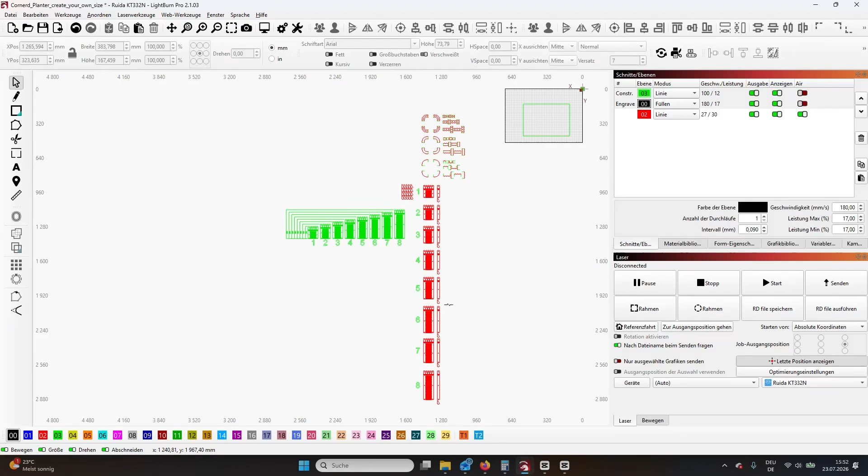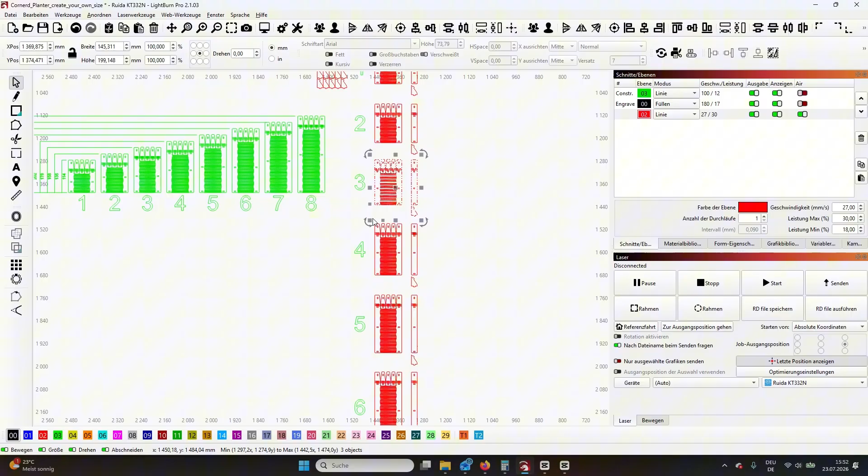First, choose the height of your planter, for example, number 3. Duplicate it by pressing Ctrl+D. Now duplicate the template for the top ring.

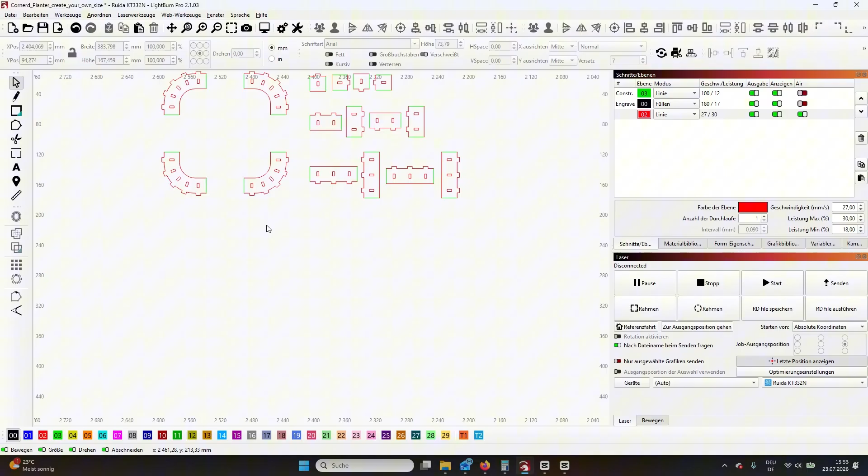Create a little space between the corners. Choose the desired section. You can use one or several in different lengths and widths. Then snap them to the corners.

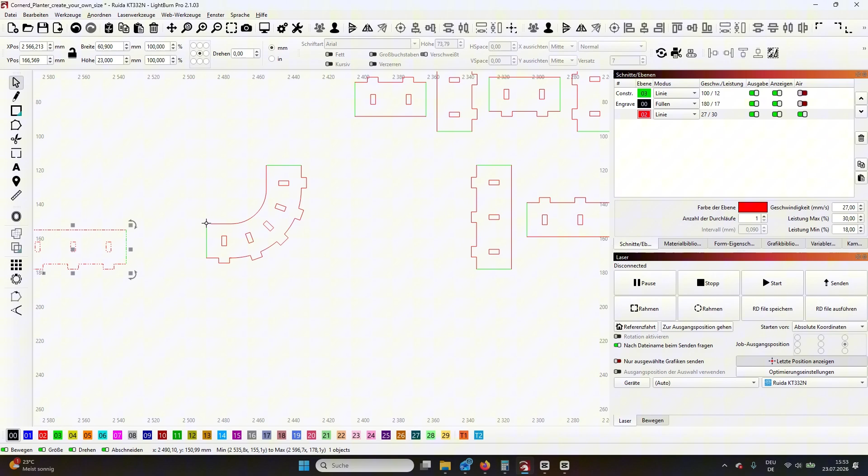Note, I made a mistake here. If you want to extend the planter by 5 slats later, you need to insert modules with 5 tabs here, one with 3 tabs and one with 2 tabs, instead of using only the 3-tab module.

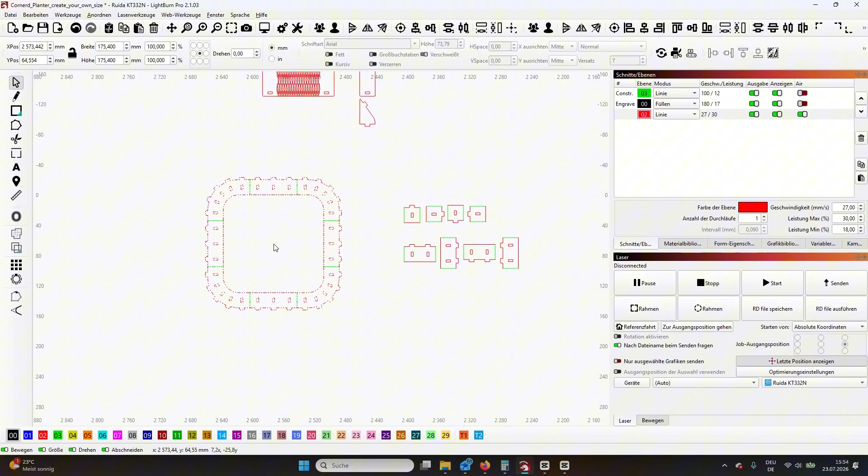Repeat the same process for the next 2 rings.

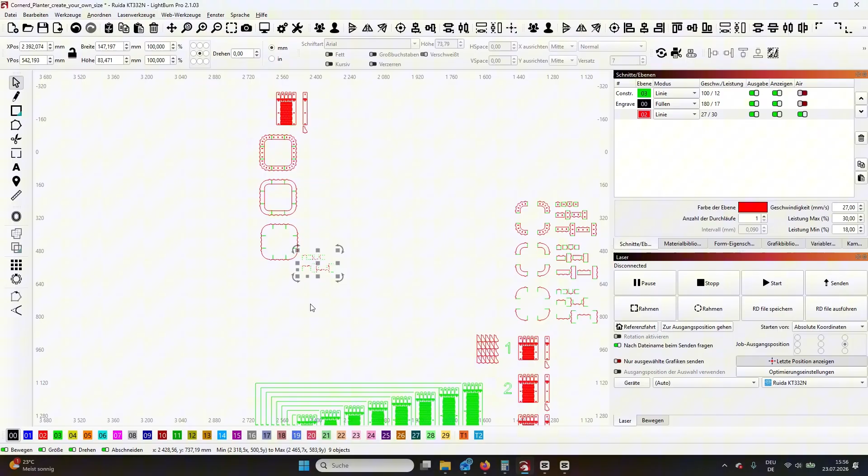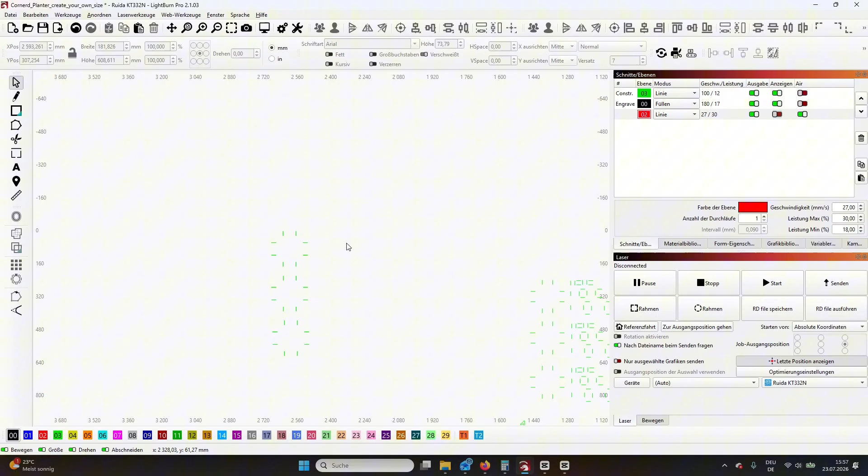Ungroup the design by pressing Ctrl+U, disable the red layer, and delete the green guidelines. Enable the red layer again.

Select all lines and press Ctrl+J to join them. Then group each ring individually again.

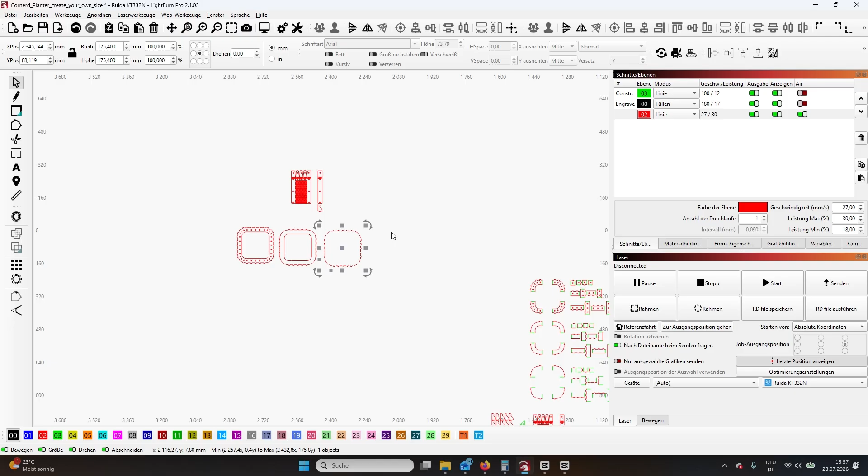Now duplicate the minimum number of corner connectors and add the required number of slats for each side.

Now duplicate the required corner connectors for all 4 sides.

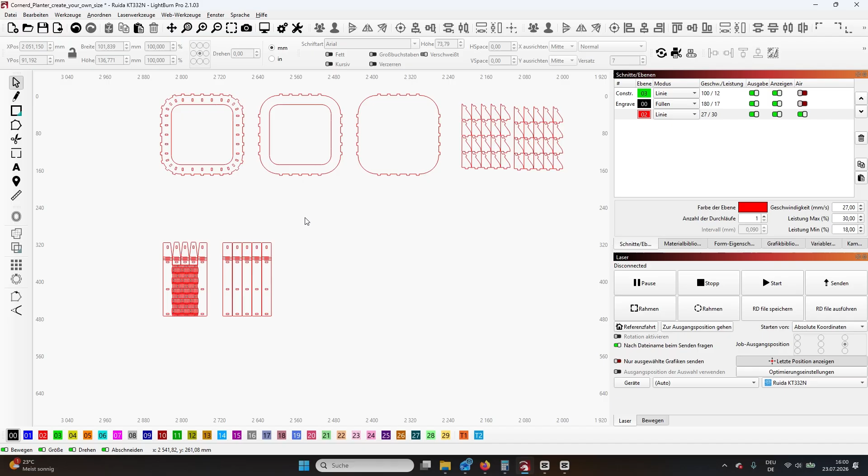Group the slat module by pressing Ctrl+G, then snap the module to the corner piece.

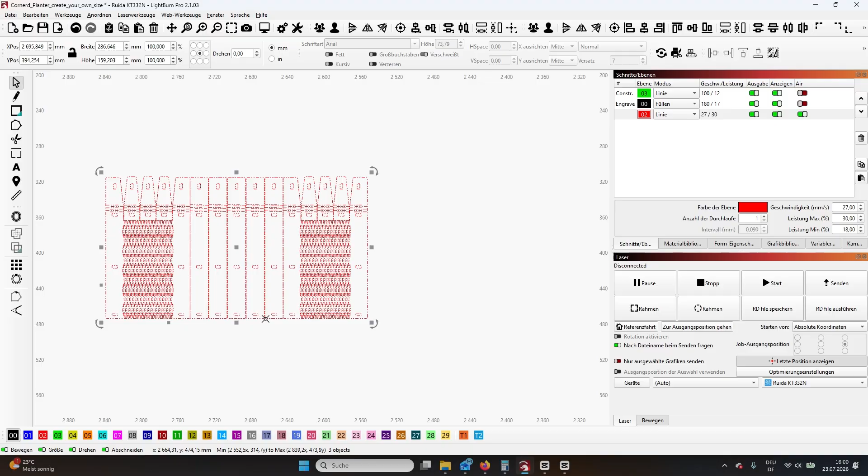Duplicate the left corner piece, then snap it to the right side of the slat module. Finally, enter -0.5 in the X position to create a 0.5 mm gap between the modules.

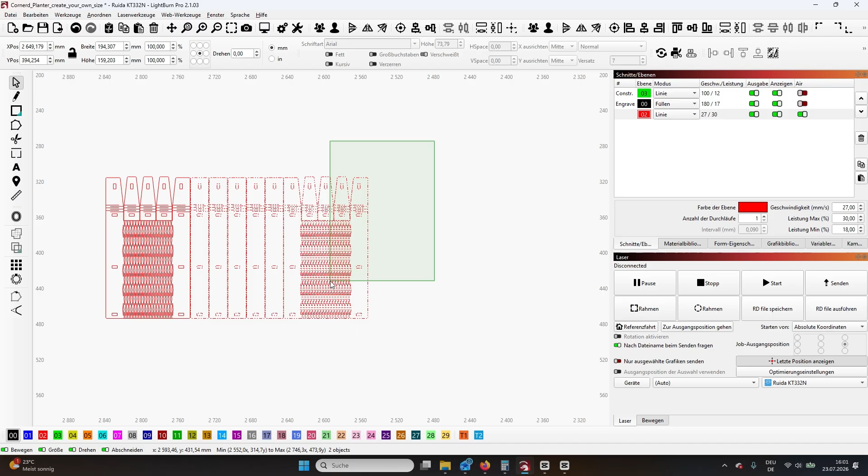If you want to add an engraving, import one of the included engraving patterns.

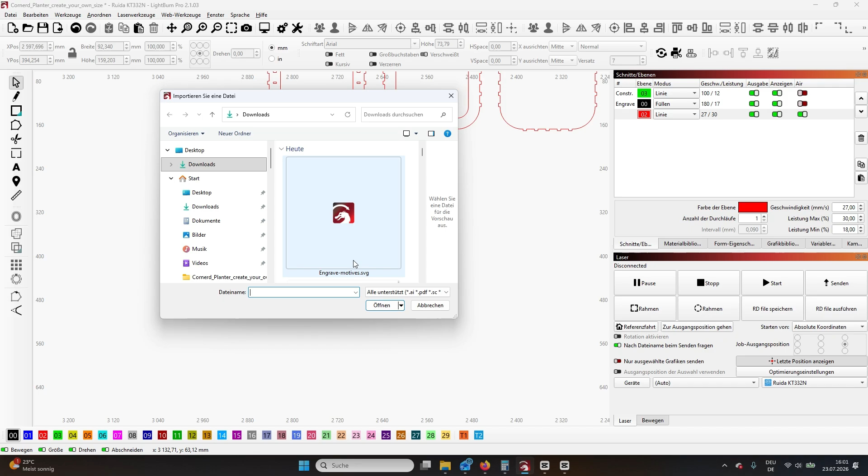Choose a design, group it, and delete the rest. This reduces memory usage and helps keep LightBurn running smoothly.

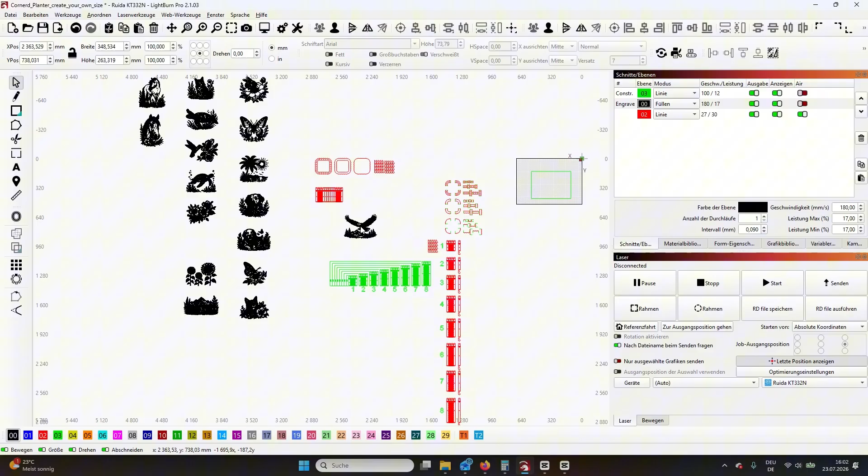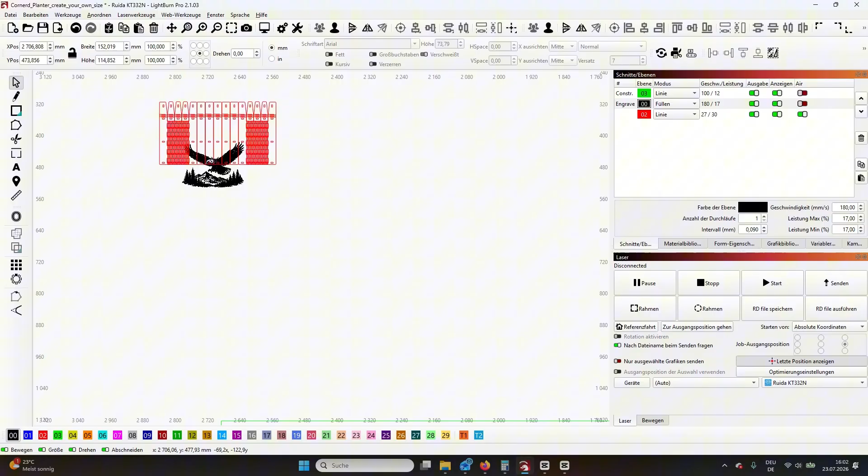Move the design onto the slat module and roughly position and scale it. Use the center tool to align it with the slat module, then adjust its height.

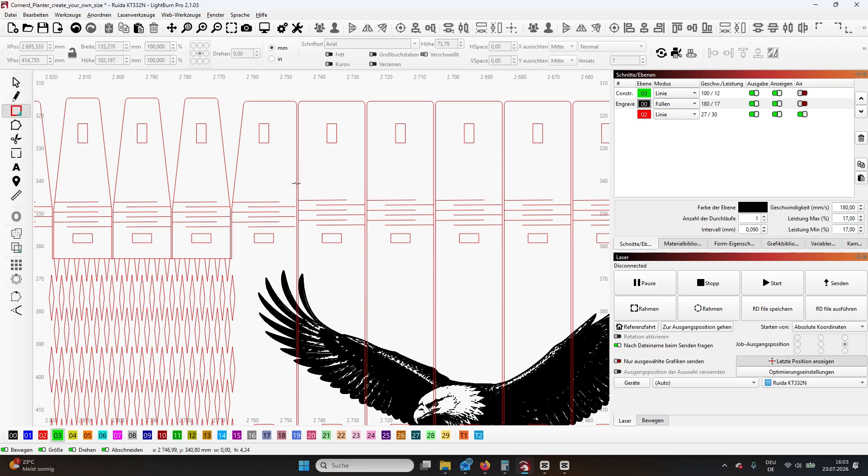If you want the engraving to extend across the corner pieces, as shown here, you'll need to split the engraving into sections. To do this, snap 3 rectangles on the green construction layer to the cut lines.

Then duplicate the entire design 3 times.

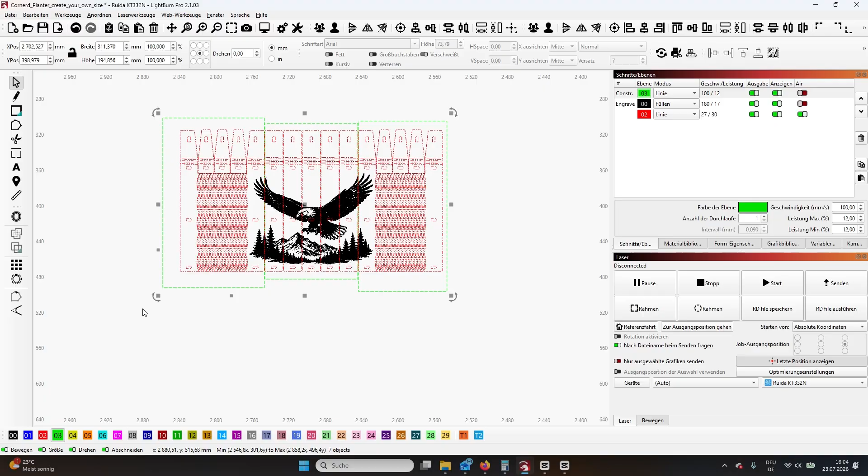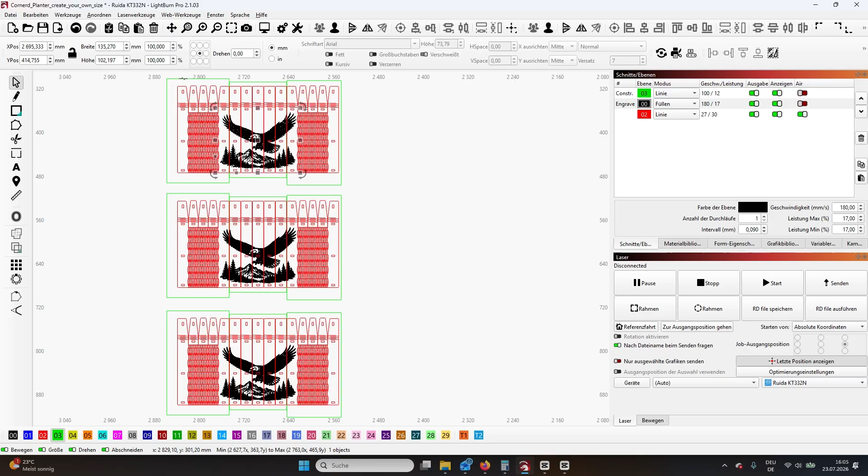Select the engraving, then hold Ctrl and select the cutting rectangle. Use the Boolean subtract tool to cut out the section.

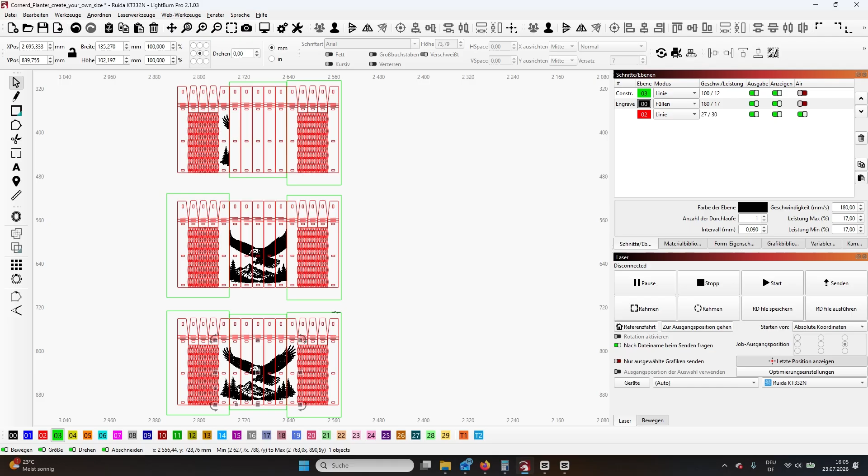Repeat the same process for all 3 modules. Delete the empty modules.

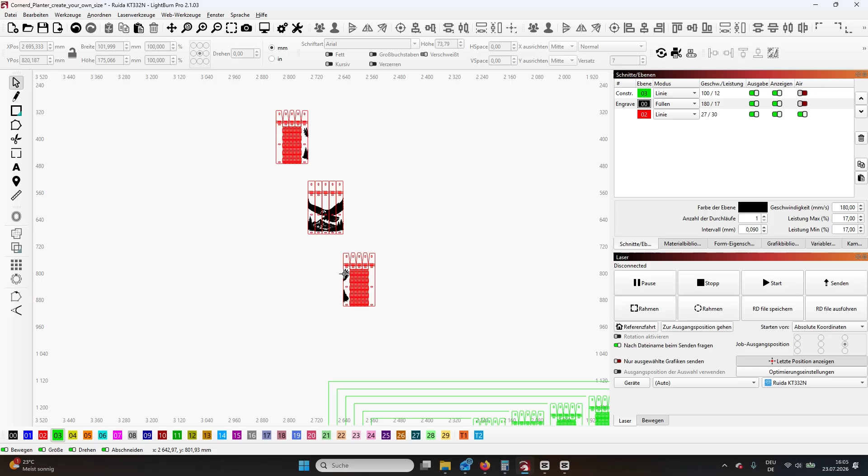Select everything and press Ctrl+G to group it. Now align all 3 modules so they're level at the bottom.

Ungroup the right corner piece again. Select the engraving section and align it left with the left corner piece. Then group the left corner piece again.

Then delete the right corner piece.

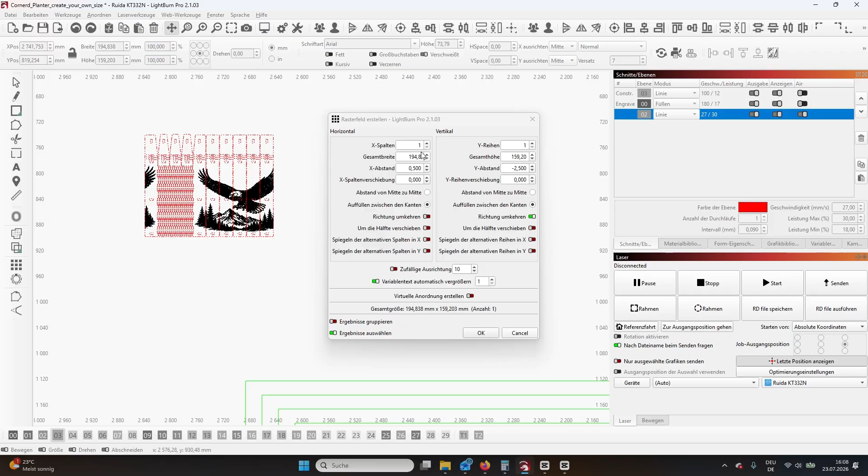Duplicate it to create 4 identical units. Now arrange them on the laser bed however you like.